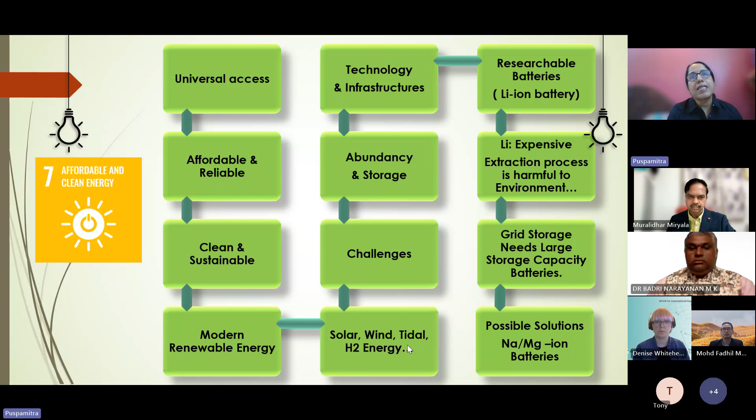So what is the alternate? What is sustainable, green, modern energy? We look at options like solar energy, wind energy, tidal energy, hydrogen energy, etc. But if we look at the current facts, we are still dependent on fossil fuels, because practical realization still has challenges.

So two things we have to look into: abundance of production of clean energy, and the other factor is storage. For that, infrastructure needs to be developed, and technology simultaneously, working hand in hand. Out of many aspects and prospects, we have to look for clean energy.

One is storage energy, because, as I will describe in my next slides, storage is so important. One of the storage materials we all know is the lithium ion battery. But why are we still looking for more alternative options? Because lithium is expensive, and the extraction process is also not so environmentally friendly. We need grid-based storage, and a possible solution is sodium and magnesium ion type new batteries.

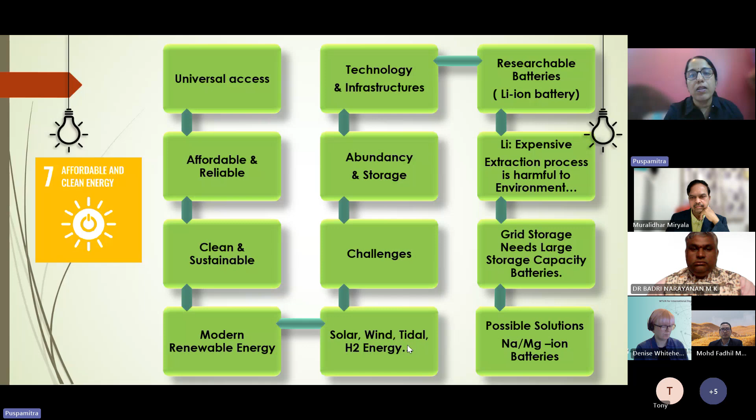But what happens after 6 p.m.? Even in those countries, the demand for electricity is higher. People are returning home from work, they need to cook, do laundry, use AC, everything. But we are still dependent on fossil fuel based energy. So where is the problem? When we have enough solar energy, we are not able to store it.

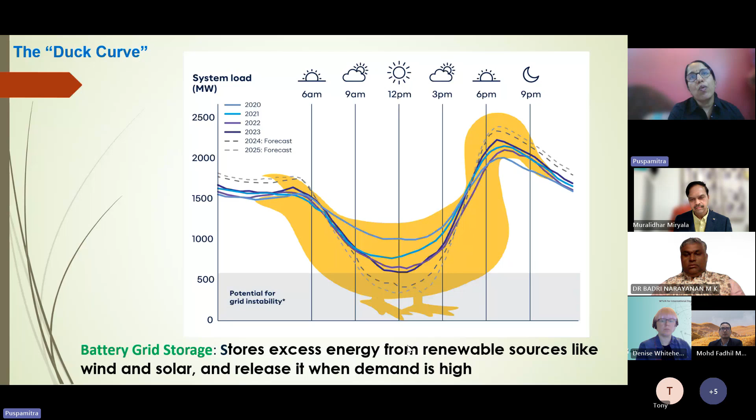When it comes to storage, the best thing that comes to mind is rechargeable batteries, which are much better than the disposable batteries we used to use in the olden days. These rechargeable batteries, what we currently use in our laptop or mobile, are lithium ion batteries. They can be used several times for months together, so they are environmentally friendly, qualifying many SDG goals.

In 2019, the Nobel Prize in Chemistry went to three scientists. In 1991, the lithium ion battery was commercialized. The middle scientist, Dr. Goodenough, was called the father of the lithium ion battery. Professor Stanley first gave the idea of the lithium ion battery. This is all about the lithium ion battery.

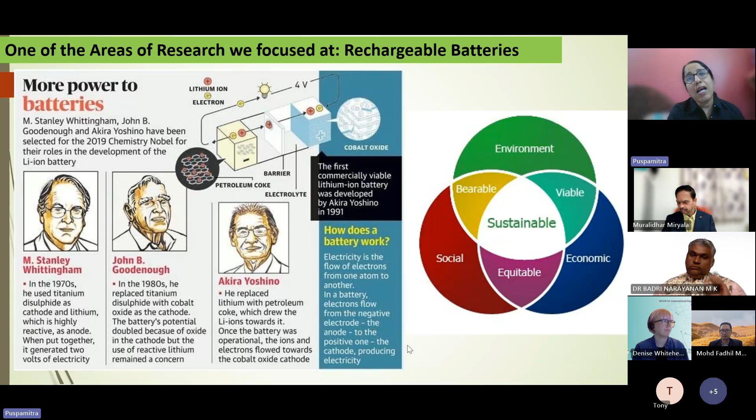Now the question is, when we have lithium ion battery, what problem were we looking for? This picture shows all of us, smartphones, laptops, all the gadgets, completely dependent on lithium ion battery. And next we are thinking about electric vehicles, where we also want lithium ion battery. But lithium is not earth abundant, it is quite expensive. And if we want to use it for grid storage, meaning storing energy harvested from solar, wind, or tidal energy...

To meet that factor, our lithium supply on this planet is not enough, and lithium will be expensive. Once the energy is expensive, it cannot meet the goal of affordability, it cannot be affordable for everyone. So we need to look at alternative solutions to store this energy. Now we need to look for alternative energy sources.

If we all remember from school or the periodic table, the next atom below lithium is sodium. Just to recall from school, the outermost electron configuration for lithium is 1, and for sodium it's also 1, so they are considered to belong to the same family.

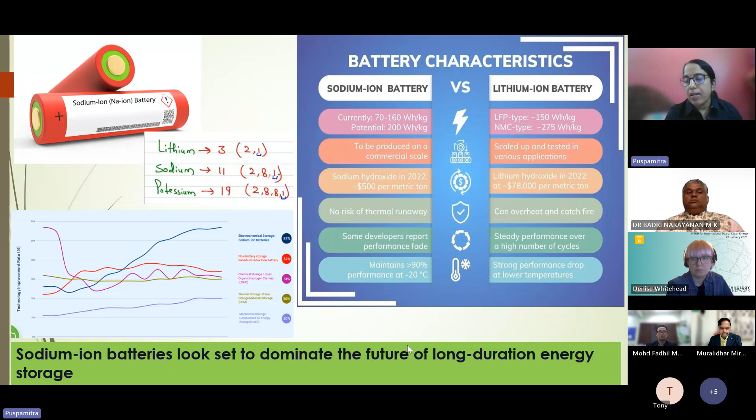Then the other possible solution is magnesium ion battery. If you look at the periodic table, it's in the next column, touching at the corner, but it has another advantage. I will explain in the next slide or two how lithium ion batteries work.

Most of us know this, but as a refresher: when lithium moves from the positive to negative electrode or negative to positive, electrons move. The current we get is the movement of electrons, that's what we need. But in the case of lithium or sodium, as I showed in the previous slide, there's only one electron per atom. If one lithium moves, we get one electron.

But in the case of magnesium, for one magnesium atom we get two electrons, so the charge density will be right away double if instead of lithium we use magnesium. It is also the fifth most earth abundant material compared to lithium. The atomic radius is also technically important, which I'll explain in the next slide. But considering specific capacity and volumetric capacity, if we reach a practical applicable magnesium ion battery, we will be at the best possible case for developing a grid-based storage system.

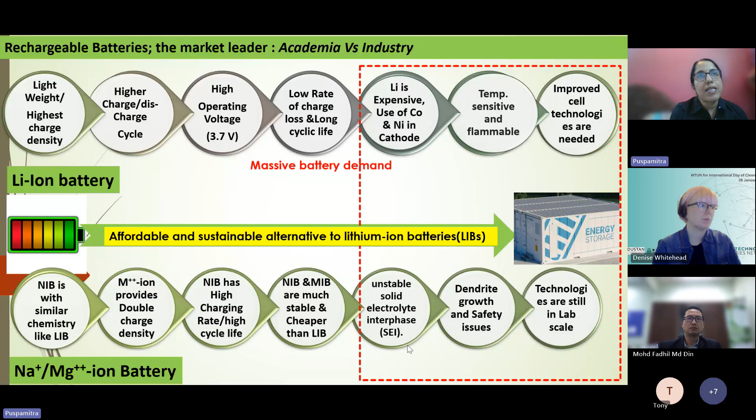Of course, sodium ion battery use has started, but it is yet to be achieved, to come parallel with lithium ion battery.

So now I'm coming to this normal view of how the battery works. It has a cathode, it has an anode, a separator in between, and some electrolytes are there.

So when we are charging lithium or sodium or whoever, the ion responsible for the battery, they will go from cathode to anode. Cathode is the host material, which will be rich in that material. If it is a sodium ion battery, it should be a sodium ion rich material. But the anode is a porous material which should happily hold them during the charging and allow them to go back during the discharge process.

So what happens when the sodium or lithium or magnesium come from the cathode to anode and go back? The anode material, they are not very orderly like school children that will come and sit at this place and go back. They hit each other, volume degradation happens. So anode material slowly breaks. Then when they go back to cathode, they unevenly get deposited. That is called dendrite growth.

So there is a connection between cathode, anode, and battery life. Explosion happens and other things happen. Most importantly, this anode material interacts with the electrolytes and forms a film, which is a barrier. It doesn't allow the ions to intercalate, meaning it doesn't allow them to go to and fro from cathode to anode.

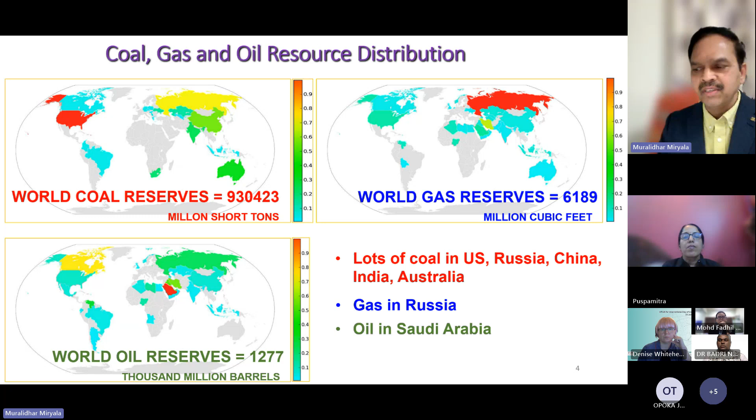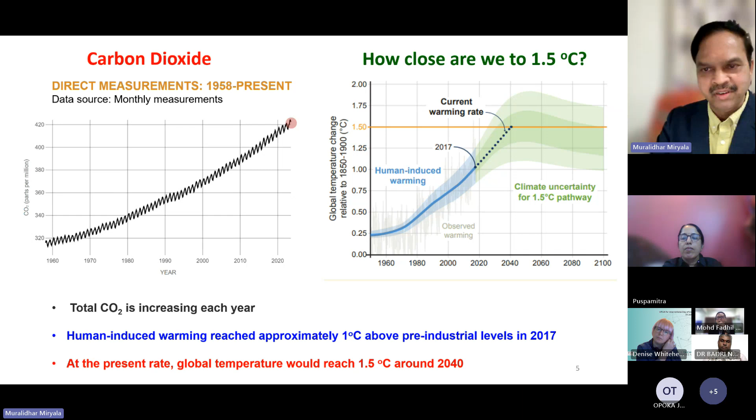However, in the last two years, reports indicate extreme heat and loss of Antarctic sea ice, which was recently reported in Nature. This is one of the biggest issues in reversing climate change. Even partly, we need to remove on the order of 2000 gigatons of CO2 from the atmosphere over the next century.

What I showed before is that 1.5 degrees centigrade was projected to be reached around 2040. However, as recently reported in Nature, the rate of global warming is accelerating very quickly. By 2025-26, they are expecting to reach 1.5 degrees centigrade.

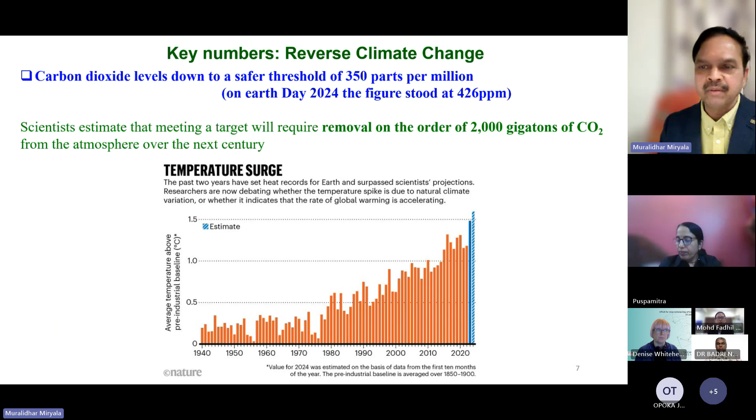In that case, energy source considerations become very important—they must be clean, unlimited, renewable, and also economical. This is one of the more important and interesting phenomena right now, and what engineers and scientists need in order to combat climate change. New technologies that reduce our environmental footprint are important, such as renewable energy sources and fuel cells, which the first speaker explained, along with efficient and low-cost manufacturing of these technologies.

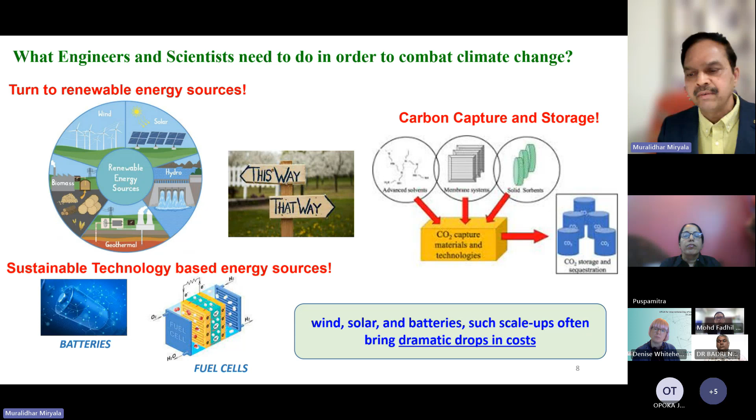Further, I can say, since I am working long-term on superconducting materials, high Tc superconducting technology will address the impact of climate change.

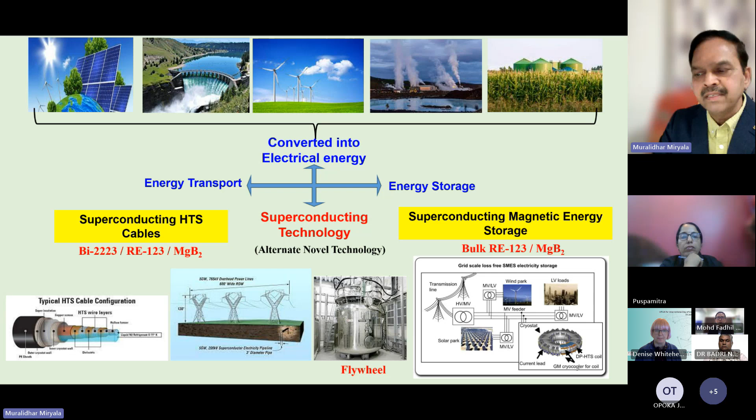Energy transportation will be done by high Tc superconducting cables—you can see bismuth 2223, RE123, and MgB2 shown on the left side. On the other hand, energy generation and storage will be covered by bulk RE123 materials and MgB2 materials, shown on the right side figure.

This is one of the inventions we made here, REBCO. In 1986, Bednorz and Müller made the big discovery of a material that becomes superconducting at high temperature. Within one year, Paul Chu at the University of Houston replaced the element with yttrium, raising the temperature at which it becomes superconductor to 93 Kelvin—higher than the boiling point of liquid nitrogen. That was one of the important steps.

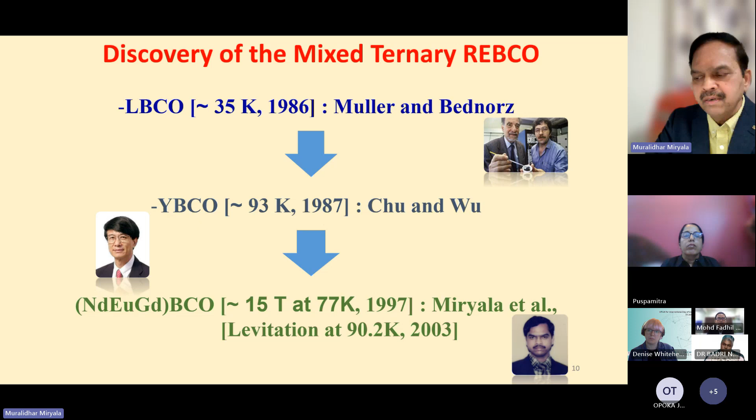Further advancements came from substituting yttrium with three elements, RE1, RE2, RE3. We made more than 60-70 compounds with neodymium, europium, gadolinium, reaching cases of more than 15 Tesla. This improvement opened the door to use in many industries, like making powerful magnets for fusion, transportation, and also better medical tools, etc.

This is the first material's performance. We designed a ternary superconducting compound of three light rare earth elements in the unit cell. As a result, they found very high critical current density at 3 Tesla. This is the first material.

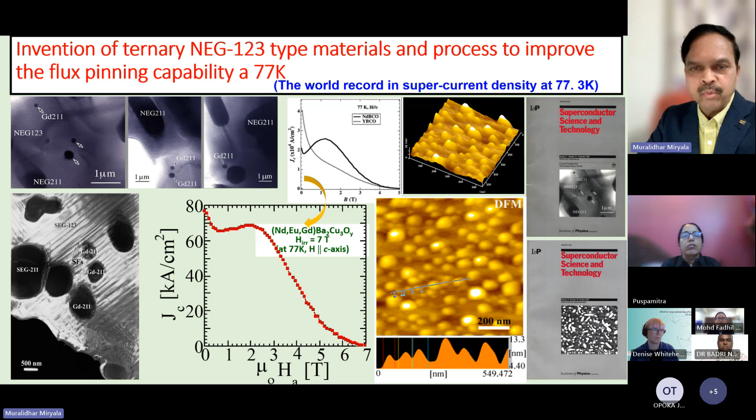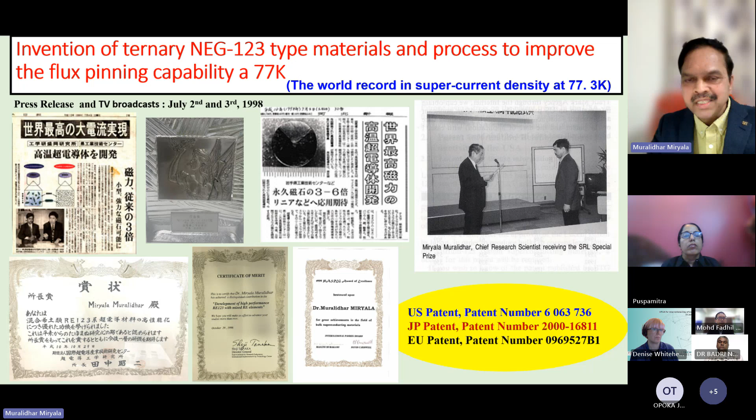We found nano-pinning media like gadolinium 211, and also some new particles in this material. As a result, the findings got highlighted in many newspapers and TV news. They were patented in the US, Japan, and EU, which was one of the turning points to improve the critical current density at liquid nitrogen temperature at higher magnetic field.

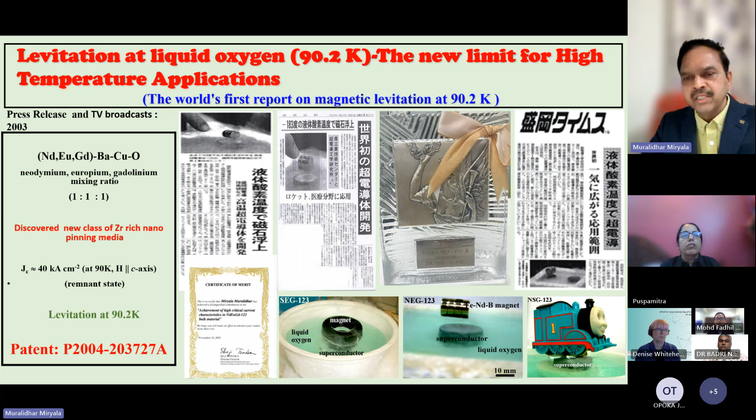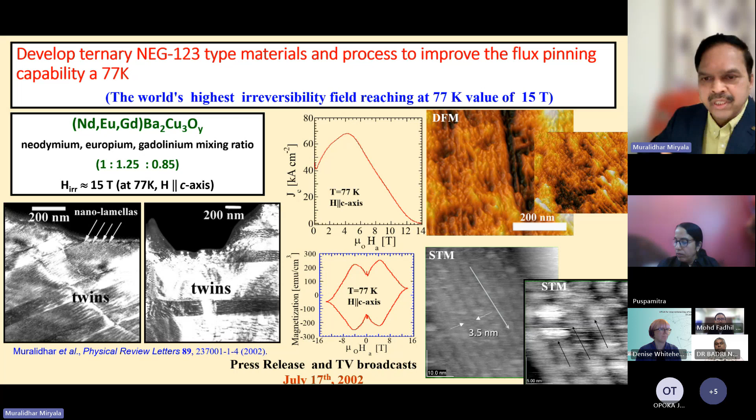But however, with all these super magnets, the cost is very high—it's like $3,000 for a 3-centimeter magnet. Of course, with a 3-centimeter magnet, we can make a 3 Tesla superconductor.

However, to reduce the price, we successfully developed batch production methods for the RE123 type material at low cost, making it a world-pioneering report of such production. We made specific conditions and eventually achieved production. This achievement has led to securing a new Japanese patent and widespread adoption of our results by a number of commercial enterprises.

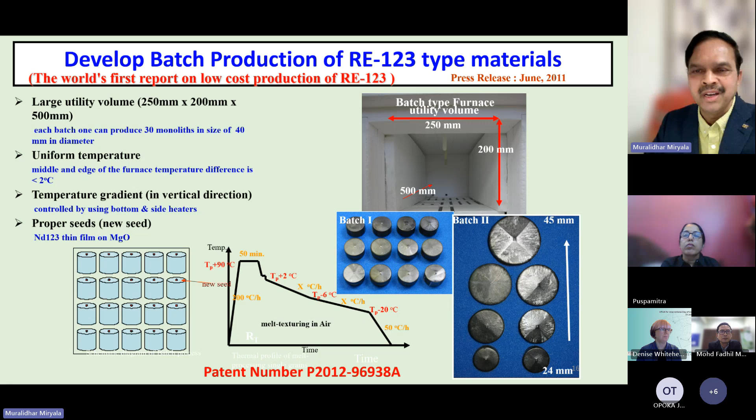So something like that. This material development is crucial. We made it, and I would like to show some of the applications of what they are doing right now.

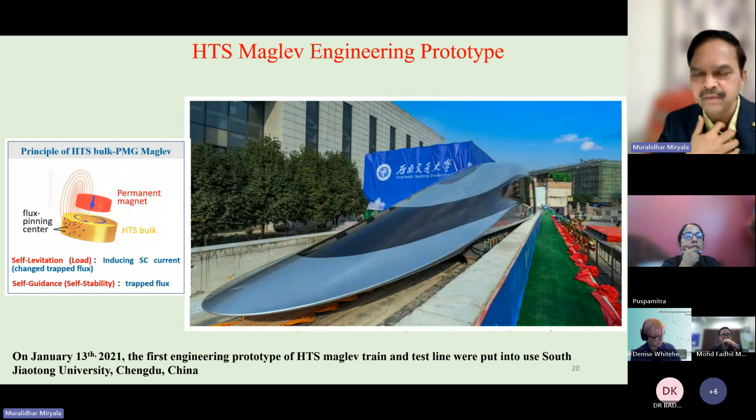So if you want to reduce CO2 emissions, superconducting technology is one of the keys. Another area is power transmission and generation. When electricity is transmitted from the power station to homes, about 5% of it is lost. They think it's just 5%, but that is roughly the same as the output of 6 huge power plants in Japan.

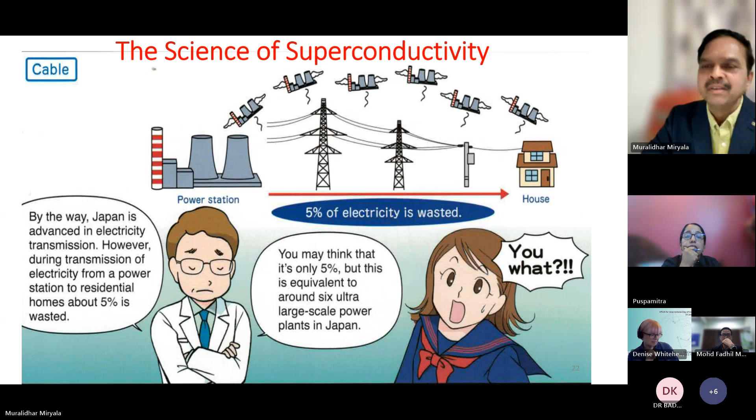So thinking about this, many companies and many countries are now moving toward superconducting cable parts. Several companies worldwide, in Germany, Japan, US, Australia, are making YBCO cables, bismuth-2223 cables, bismuth-2212 cables, and MgB2 cables. The global superconducting cable market size is currently $300 million, but it's expected to reach $700 million by the end of 2027.

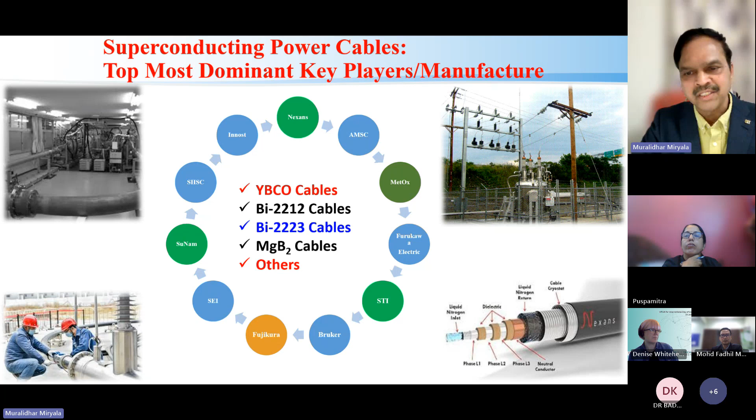Especially when you look at the railway application, because I worked 4 years on this application, the railway, I want to introduce railway application specifically. There are 3 key benefits for railway applications: one is load leveling, second is energy saving, and third is CO2 emission reduction.

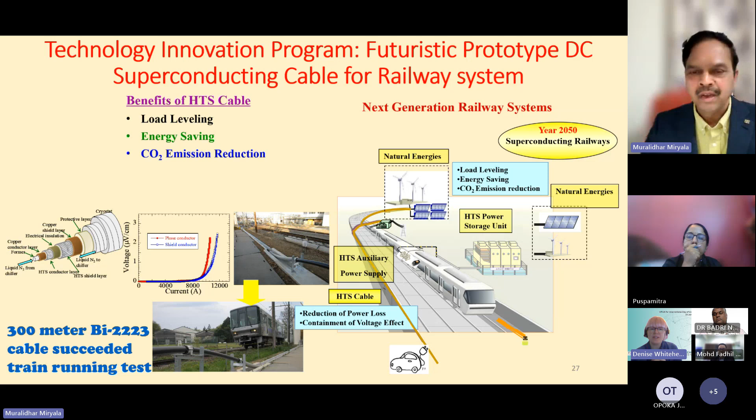Just a time warning there, Professor. Yeah, like that we can make it.

So I think high temperature superconductors have the potential to play a role in addressing climate change and supporting the goals of SDG 7, focusing on affordable and clean energy. To make the most of these materials, it is important to understand their excellent physical properties and market them effectively. This will help bring them to the market at an affordable price and overcome any initial resistance to new technologies. Thank you very much.

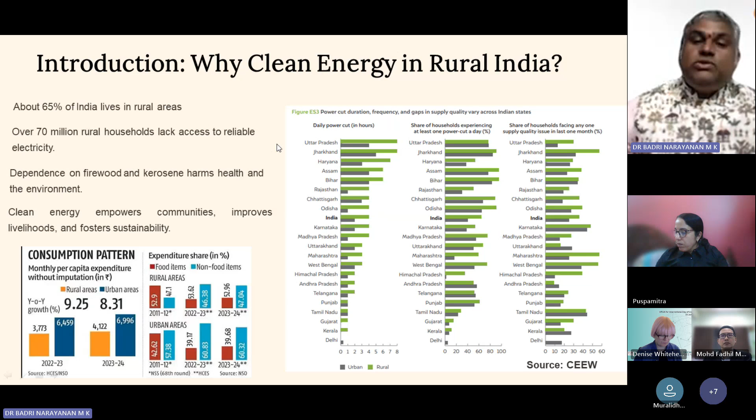So the first thing, you can see here a rural area is something which is far from the access. At least in some of the places, the accessibility is still an issue. So the non-government organizations, the NGOs, play a major role.

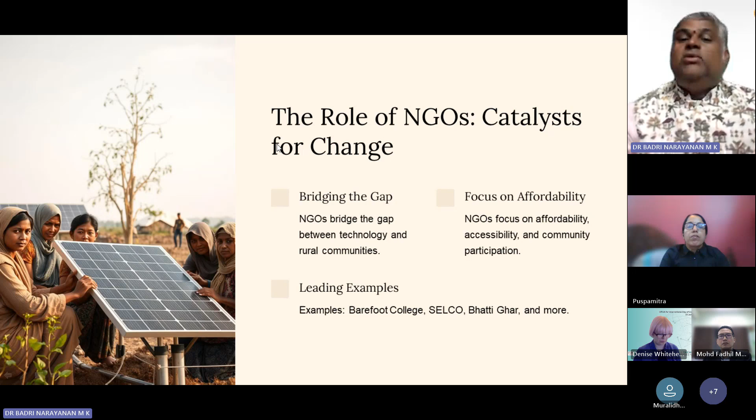What we are going to see here are some experiments done by non-government organizations, which have forged a partnership across the community, the funding agencies, the technology providers, all brought together to catalyze this change process. So whatever innovation comes in the market, for it to be absorbed in the rural areas, the NGOs play a very major role in terms of the policy reaching the last mile. The first case study we are going to see is of Bhatti Ghar.

This is a very interesting NGO which operates with village rural households, and especially they started with simple solutions for the pushcart vendors. Some interesting experiments they started with is like somebody who is hawking fruits or vegetables on a pushcart does not have access to power supply. He cannot afford a shop, so he just keeps moving a vehicle which runs on two wheels manually, and he goes around selling whatever product he has.

His market is limited to the availability of power supply. So here Bhatti Ghar comes with a solution: a solar powered weighing scale, used by the pushcart vegetable sellers and fruit sellers, and a lighting system which keeps the business going even after the sunlight diminishes. So the problems are unique. Sometimes, as urbanites, we don't recognize that a problem like this exists. But when it comes to rural India, such complexities exist, which might be taken for granted in an urban scenario but might still be an unresolved issue in a rural area.

They have also come up with a solar powered community kitchen, because one major challenge in a rural area is increased reliance on firewood and LPG. The government has been trying several mechanisms to convert this. Even if you just tune into the news that features India, you would have heard the suffering that happens in the national capital of Delhi because of stubble burning.

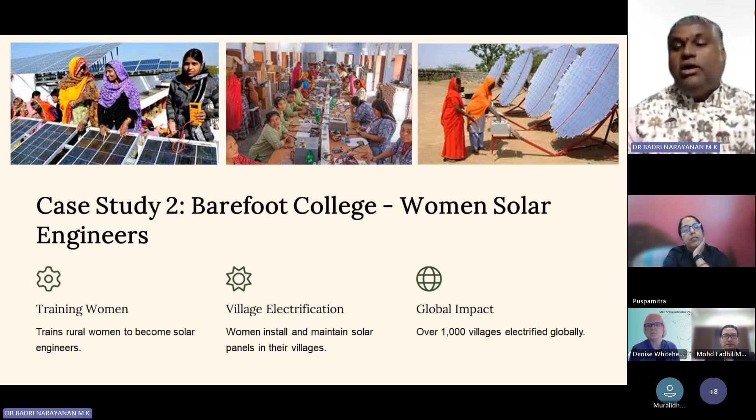So sustainability is also to be seen from the part of knowledge sharing, so that the adoption of technology is sustainable for a period of time. All the new technologies being discussed in this session must be broken down to such an elementary level where it can be given in a box to the people for understanding and adopting the technology. That shall make it more successful. That is an appeal to all the great minds working on this technology.

The third case study is of SELCO Foundation. As I told you, rural households are experiencing up to 8 hours of power shutdown every day. Imagine the efficiency of enterprises working in rural areas. Apart from agriculture, you see a lot of small businesses: somebody doing a sewing machine, stitching, tailoring, somebody selling dairy products by storing them in refrigerators, somebody running a small grinding machine.

They require small quantities of power, but if power is not there for 8 hours during the daytime, and you experience low quality power supply, then how do you serve your customers? It is not about the targets of a Walmart or a kind of conglomerate where, in one kind of economy, you have a strategic diversification of your portfolio. If one portfolio or customer segment is not working for you, the other customer segment will compensate for that.

This is a very close community, so it's very difficult for them to compensate for the losses of a particular day, and the rates at which financing is done in rural areas for the communities is very high.

So such underserved communities are highly benefited because of such solar experiments, and this SELCO Foundation has empowered rural households and rural livelihoods like sewing machines, solar powered sewing machines, dairy equipment and small businesses, which help them keep the business going, keep them working so that their income generation doesn't stop, and it brings them out of the problems they face in poverty. So this is the case study of SELCO Foundation, which empowers women in small businesses in rural areas.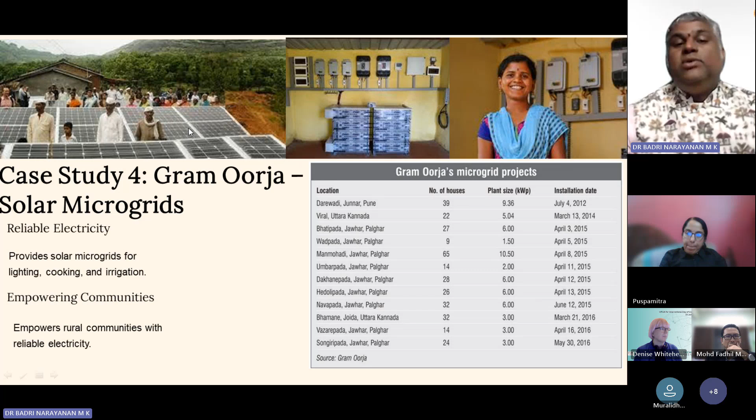So this kind of microgrid definitely empowers the rural communities, and they have proven it in smaller pockets. If this is replicated and scaled across different pockets, that's going to empower a lot of people and make this affordable clean energy a possibility in the future.

Another is this case study of Development Alternatives.

This is again an NGO, Development Alternatives, which runs experiments across the world. This is one case study from India. India has a very interesting setup.

When you bring into the cultural context of a village something that encourages technology adoption, it also serves the purpose of achieving affordable clean energy. When you bring about a behavioral change, especially in terms of technology adoption, if it goes against the routines of a rural community, that becomes a difficult thing for them to adopt.

Here is one experiment where Development Alternatives has formed women groups, for which Bangladesh was once an inspiration, and it has been highly adopted in India - women self-help groups, formed as energy clusters. So 30 to 40 women running 6 to 8 livelihood enterprises come together to manage a gaushala, that is a cow shelter, which generates biomass.

That biomass is taken into a biogas plant, and that facility helps supply drinking water. It helps irrigation. It runs a milk chilling plant. It runs flour mills. It is helpful in spice grinding, and a lot of such uses. Also, it helps in protection of the animals.

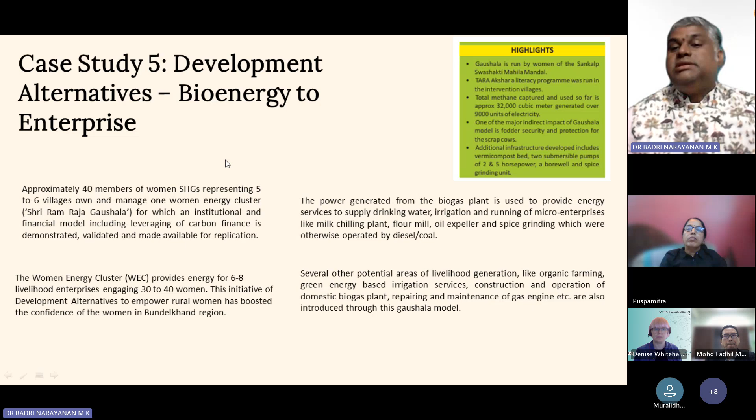So this kind of thing, which is a win-win, solves a problem while giving employment and livelihood in rural areas, has been demonstrated by Development Alternatives, where they have given bioenergy to enterprises. This can really be scaled up if intertwined with milk federations, which are procuring milk across rural India - the second largest employer after agriculture in rural areas.

Then coming back to Delhi's issue, where rice husk is burnt - stubble burning - just causes...

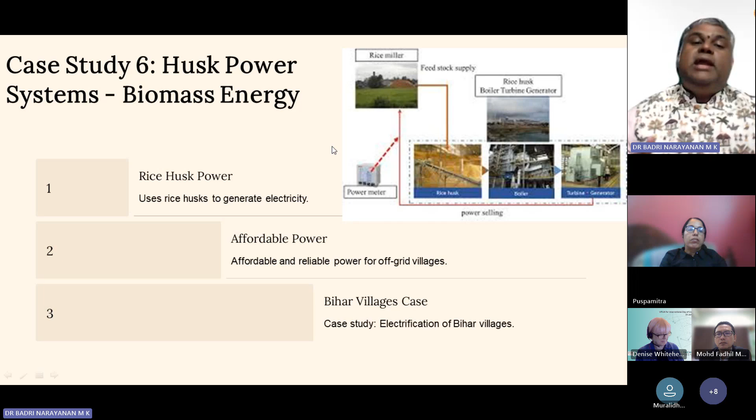In fact, India Post, the Postal Department of India, tried this, but this is a community-based intervention which has been proven successful in several parts of India, especially in Maharashtra. There have also been successful experiments by a very popular NGO called PRADAN, which spearheaded microfinance initiatives across India. They have empowered rural communities with solar-powered lift irrigation.

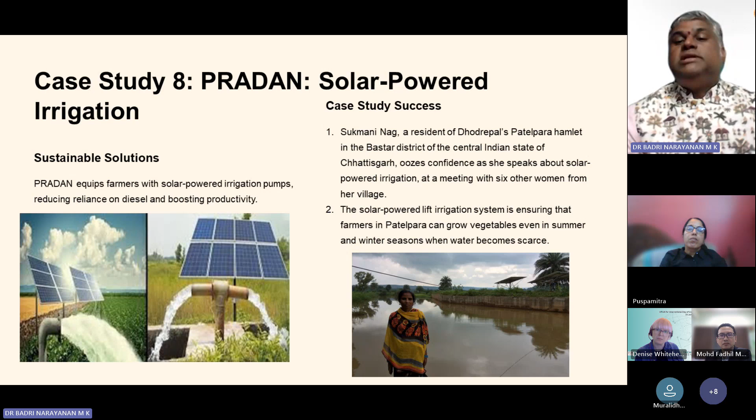Imagine 8 hours of power cut and you have a field to irrigate, and there is no proper power supply - how do you run your pump set? So these are sustainable solar solutions for a rural context.

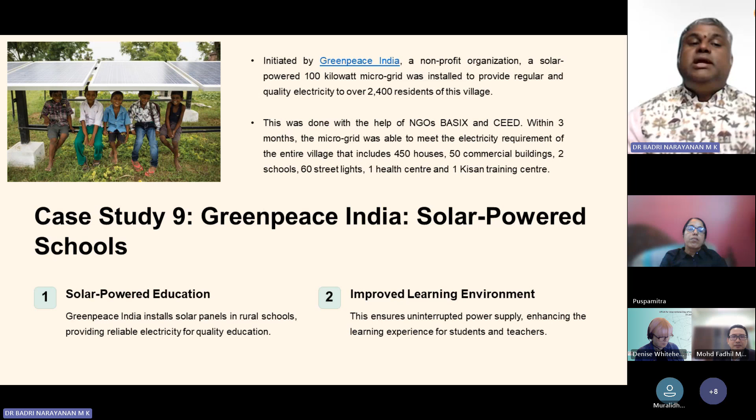And Greenpeace India has really formed a beautiful coalition by bringing together a non-profit organization - Greenpeace India - the community, an NGO, and funding agencies to fund solar-powered schools in Bihar, which has helped children study without any difficulty in access to electricity.

And finally, SELCO's solar-powered health centers. Apart from livelihoods and education, health is one major area where solar energy or clean energy is very much required. So, in coalition with the United Nations Development Program, SELCO has promoted solar-powered health centers, which have helped in refrigeration of vaccines, crucial for maintaining the health of rural communities.

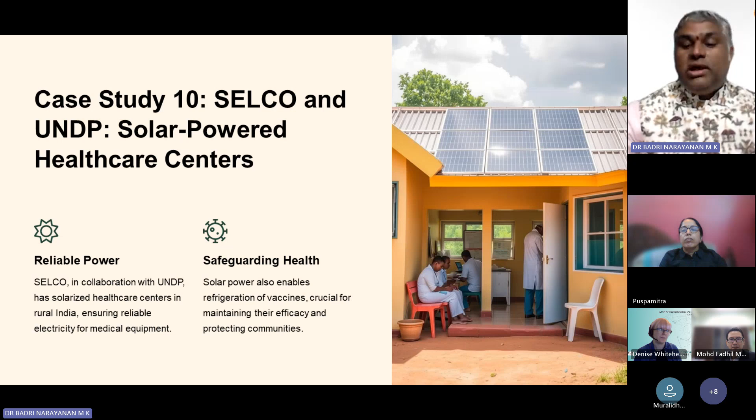So though we are talking about telemedicine and accessing healthcare, some physical infrastructure is very much required in rural areas for basic services. Such necessities can be served through solar-powered health centers. Channelizing solar energy, clean energy, to rural India can build healthier communities. It can empower citizens in rural India and pave the way for a sustainable future.

All the interesting technologies presented by the researchers today must definitely take this path to overcome challenges, to mobilize support from the government and the community, and scale up as micro models for larger success in a very complex terrain like India. I submit this to this panel, and I look forward to these technologies being taken to the village doorsteps in India, so we can achieve this dream of affordable and clean energy in the future. Thank you.

Very nice talk, Professor Badri. It's like an eye opener. We talk about science and energy, but this part was kind of hidden from many people. We should know where the real problem is and where to address. Wonderful talk, thank you. I personally felt like you researchers are spending days and nights building technologies, and you might be happy to know that whatever you are doing research on is making a meaning in several lives across this country. Every time you're doing research, you are making a change in somebody's life who is in the last mile of this country. So thank you so much for doing this for all of us.

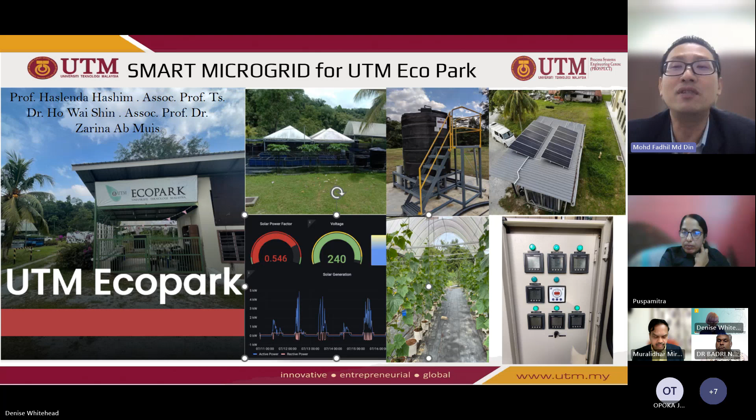Next is the concept we are utilizing, what we call machine learning, part of these solutions looking toward system controls that we can embed in sensory devices, ones that are very low cost for applications. This is what we are doing in our research, and it's a huge potential agenda for higher education.

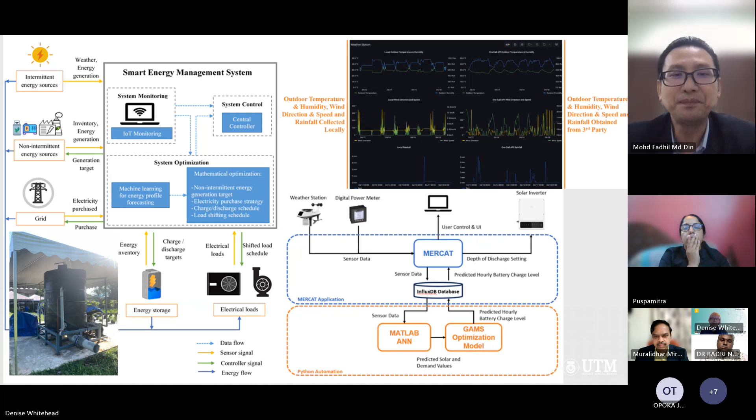Another part we try to integrate is providing solutions like solar, biogas, thermal, whatever it is. We need to highlight the consequences of reducing dependency on fossil fuel. That's why we have the GHG solution materials and simulations, adapted for industries targeted for reduction of carbon dioxide.

Our university provides this solution in terms of emissions and offsetting, because in Malaysia carbon trading is not yet formalized or executed, but this is part of the solution on carbon trading. So if stakeholders have this initiative on GHG, they can know exactly how much carbon they have already reduced.

This is most of the important things, integration about the ESG. I think ESG is nowadays mandatory for public listed companies, especially in many countries around the world, but also of course in Malaysia. So it is actually a must, you need to submit the report on the ESG.

So what exactly contributes back to higher education? Higher education provides SDG and sustainability values that we train our students with. We have our own R&D, as well as experience to provide solutions for them. This is the kind of integration we target, and it can be utilized by industry to make sure they can have a big agenda in terms of their ESG reporting.

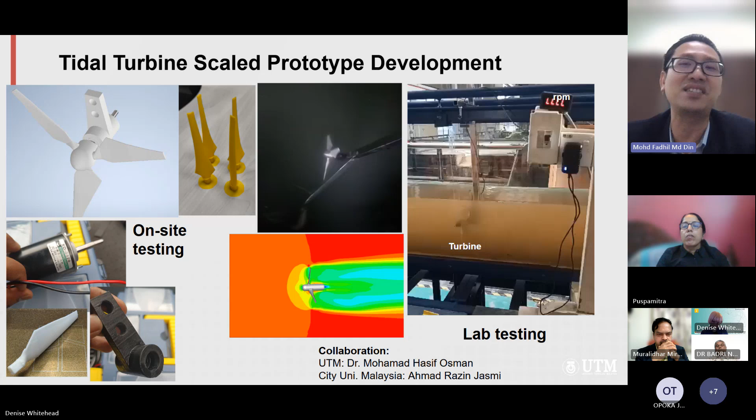Another one is similar to the previous speaker's micro turbines. These elements we provide for our villagers who need to transfer water from one level to another. So we provide a kind of mini dam, and we can create hydraulic jumps so that we can make a solution towards the irrigation part.

As well as irrigation, we can also turn that water flow into energy from the water turbine. This is a micro turbine that has been developed by our researchers.

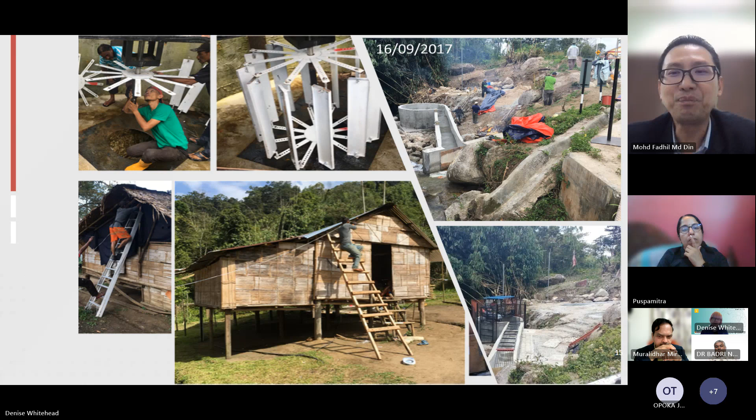We have a lot of these elements providing solutions for our villages.

Last but not least, like many other universities, we have integration and combination with curriculums, especially for the academic part. But of course we also provide a solution for industry. In Malaysia, anyone who needs to be an energy manager or work in the energy sector must be licensed or registered under our commission, under our act.

So by now our university already provides this master program. When they enroll in these subjects, they can be requested for licensed or professional energy manager positions in the field. This is something we have been doing for 3 years now, and it continues through to the micro credential program. So this is one of our major contributions towards education and professional development.

This is part of our contribution in terms of the modelings and also part of the products.